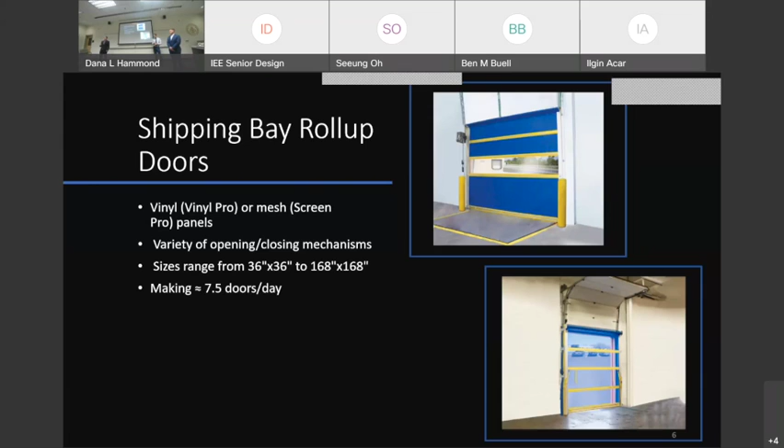What we're working on is their shipping bay roll-up doors. These can consist of different materials, but the main ones are vinyl or mesh material. They have a variety of opening and closing mechanisms for the doors. These can be a spring-loaded opening or closing mechanism, an internal motor, or an external motor, for example. The sizes range anywhere from 36 inches by 36 inches to 168 inches by 168 inches, although you can custom order sizes over 200 inches by 200 inches. Currently, they're making about 7.5 doors per day in their process.

To go over the actual assembly process, you'd start off with whatever material the door is made of. You would cut that over at the cutting table. Then you would take it over to the heat seal, where it would meet a piece of keder, like so, and the keder would be fed into the material. It's a bit sticky, so it takes a bit. Then it would be lined up properly and ran through the heat seal down in place, so that it's stuck together. It would do this for however long it needs to go—typically multiple presses for a door. It would be flipped and then pressed again for the other side as well.

Then this material would come back to the cutting table, where someone from the assembly table would come over, pick it up, and assemble it. And it would look something like this.

Now, this would use a wind bar here. This would be fed into the actual door, and it would allow it to line up. So this would be the actual height of one of the panels, and it would be multiple panels stacked up, and it would go out for however long the width is needed to be.

When you get to the bottom portion, you would take a bottom bar, and you would feed it in at the same process that you do with the normal keder, like so. And then also the bottom bar would have a specific end keder go on the bottom to make sure that it's nice and sealed.

And then the last part would take these breakaway tabs and they would go into the side of the door. And this would use the guide rails on the side when the door opens and closes to actually feed it in properly.

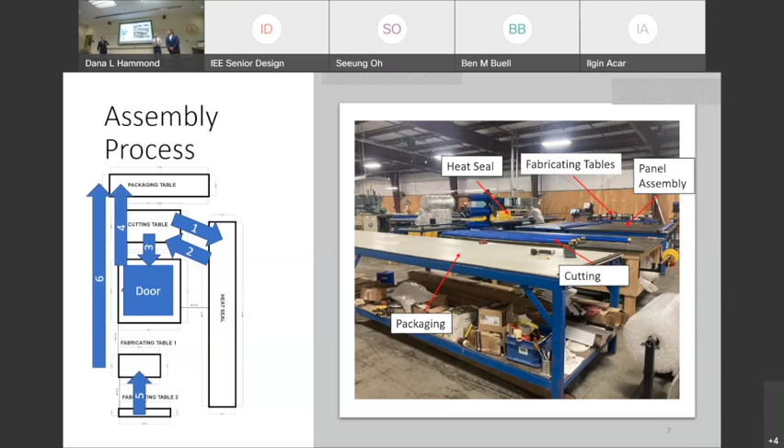At the same time as all that's going on, you'd be over at the fabricating tables where the actual cutting and drilling of the opening and closing mechanisms would be going on. Specifically the cutting at fabricating table 2, and typically the drilling over at fabricating table 1. When this is all done, the two different processes will meet up at packaging and they will be packaged together and then shipped out of the system.

So from that assembly process that Anthony just explained, we come to the challenge of throughput. Senneca came to us with this project because they're currently facing a 2 to 4 month lead time with their screen doors, and they're really struggling to keep up with demand that has been increasing over the past few years. Senneca came to us and wanted us to create a one-piece flow in the production and have everything run a little more smoothly and have less wait times between stations.

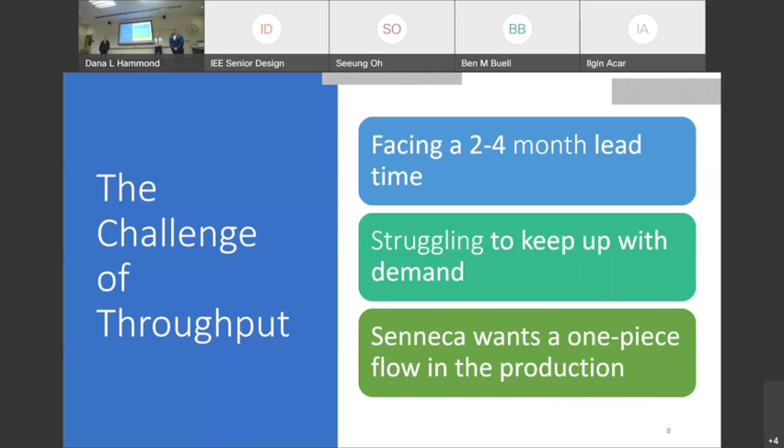So to sum that up into a challenge statement: we want to design an approach to reduce bottlenecks and inventory levels, increase throughput, and help meet a one-piece flow system.

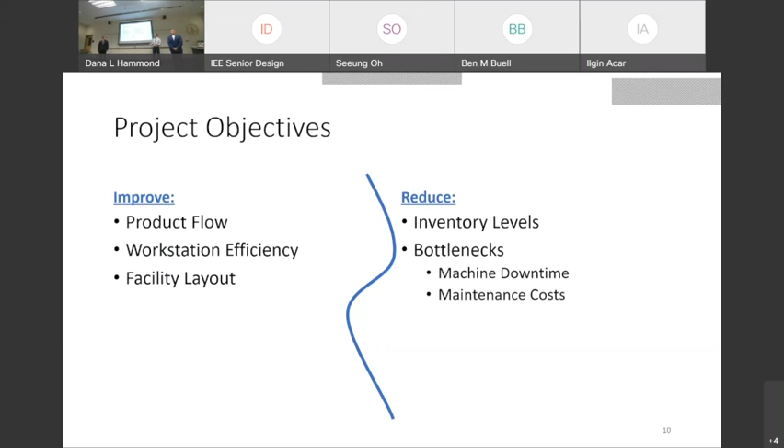To break that down with our project objectives, we have 5 of them. We want to improve the product flow. We also want to improve the workstation efficiency of the department, and we also want to do some facility layout changes. On top of improving those things, we want to reduce the inventory levels, and we also want to reduce machine downtime and maintenance costs of the bottleneck.

To organize our whole project, we used the Six Sigma problem-solving approach called DMAIC. DMAIC is a data-driven tool used for optimizing and maintaining business processes. DMAIC stands for Define, Measure, Analyze, Improve, and Control.

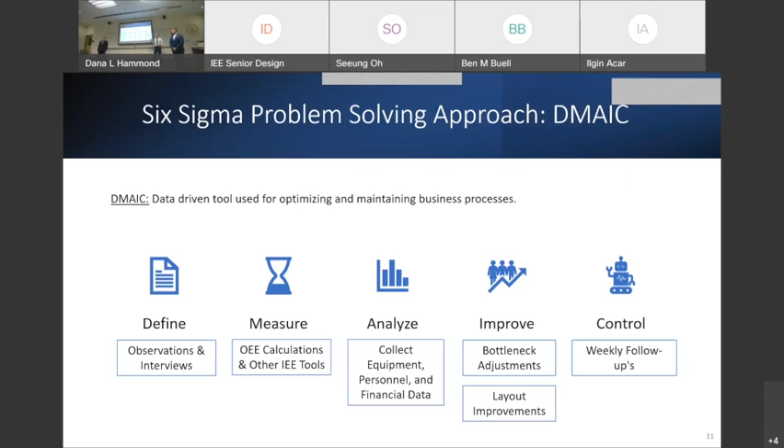What we did is we initially defined our problem through observations and interviews with current employees and management. From there, we were able to find the correct tools to measure those problems, and then we went into analyzing those measurements and collecting data. From there, we were able to make improvements, and we want to do weekly follow-ups with Senneca to control the improvements that we made.

So the first step of DMAIC is defining the problem. We have 3 main points that we want to talk about for this presentation. The first one being inventory levels. We found that there was an extreme amount of excess inventory at Senneca in the facility, and we also found out that there were some racks that were unorganized.

The second point is facility layout. There's some insufficient space and some things we want to move around. There are some lighting issues in the department, and we also want to do some workstation design changes.

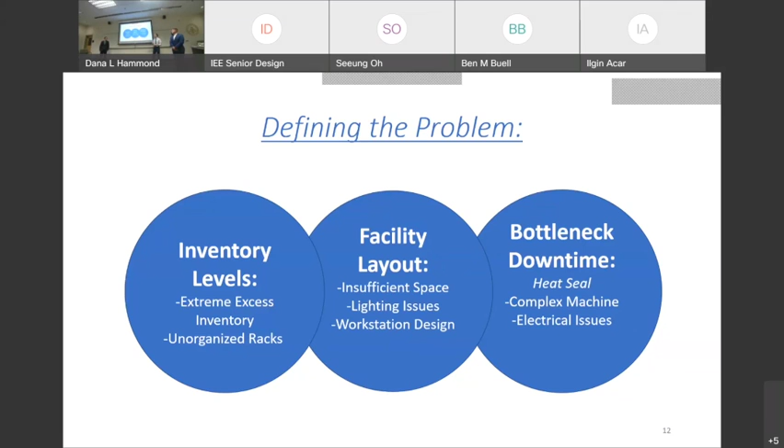Finally, the biggest topic that we spent the most time on for this project was the bottleneck downtime. We found the bottleneck to be the heat seal, and we'll go more in depth on that later, but the heat seal is a very complex machine that has been having electrical issues.

So the first topic is inventory management. We found that there are over 5 racks of vinyl rolls to make those screen doors, as you can see in this picture, and that really takes up a lot of space. We also found that there were 53 years worth of the least used rolls, and there's a large variety of these different colors and sizes, so there's a lot of different options for the customer.

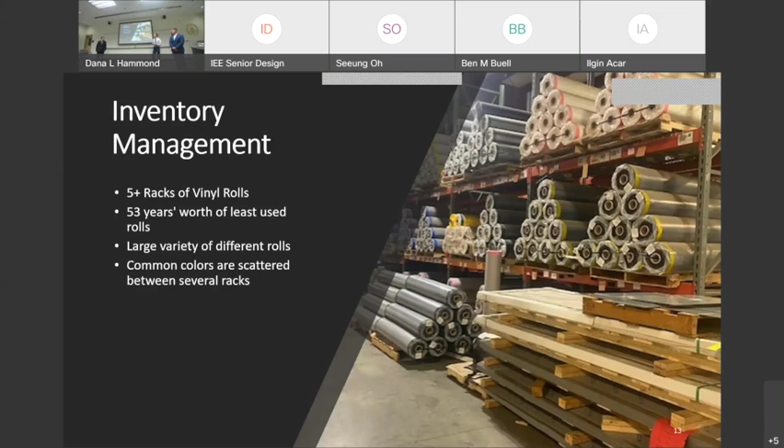The common colors mostly bought by customers are really scattered between the racks in the facility. Based on a walkthrough we did in April, we found the most common colors only took up 31% of the inventory space, and the most common colors we've seen throughout the year on this project were the blue, red, and gray screen doors.

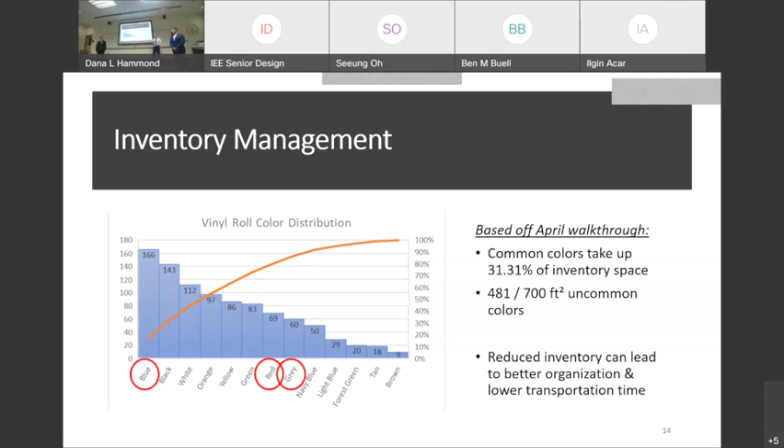That means around 500 out of the 700 square feet of inventory space were taken up by uncommon colors. So we think that if we can reduce these other colored doors a little bit, it can lead to better organization in the facility, and we can also move those more common colors to racks closer to the department we're working with.

Now Noah is going to go to our next topic, which is facility layout.

For facility layout and workstation design, the first thing we did was interview employees and the supervisor, John. The first complaint we got was the lighting in the department. As you can tell, it seemed pretty dull in there with the lighting—it was just some overhead lighting.

So we went around to each workstation and measured each of the four corners. We averaged it out to about 200 to 300 lux per workstation. According to OSHA and ISHN, it's supposed to be around 500 to 750, and with precise work at the fabricating tables—like precision drilling and sawing—it should be around 1,000.

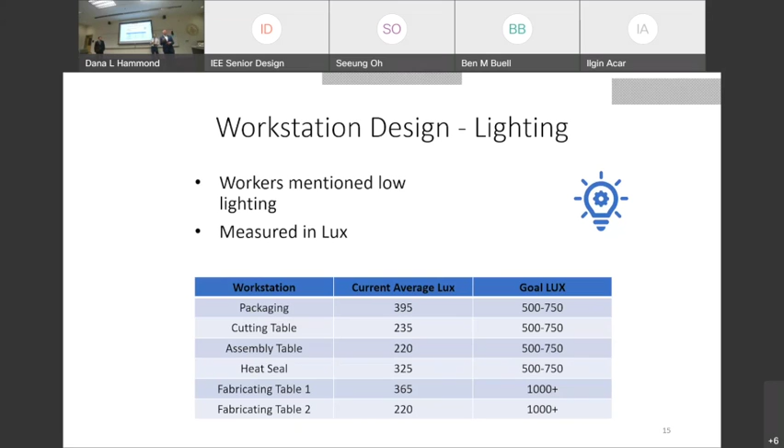Here's the old lighting, as we can see, just overhead lighting, and with this it created a lot of shadows, which could lead to error, especially at those fabricating tables.

So we brought this up to John, and on April 7th they actually installed new lighting—some overhead aisle lighting. With the new lighting, we measured it and it came out to be 700, 800, even 900 lux.

But the one problem we encountered again was the fabricating tables. They didn't get an overhead light, so a lot of the lighting was behind them, which created even more intense shadows. So we're going to recommend getting a new light for those fabricating tables so there'd be less error.

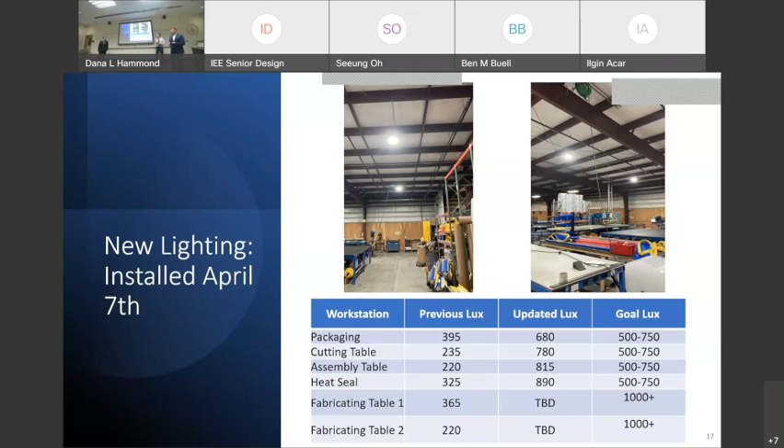The next thing we want to talk about is the packaging table and the packaging table blockage. The packaging table, as we see here, goes into the walkway we need, and it bleeds out with all the shipments, with carts around it too. We want this walkway open for forklifts and people going from department to department, so it really blocks things up.

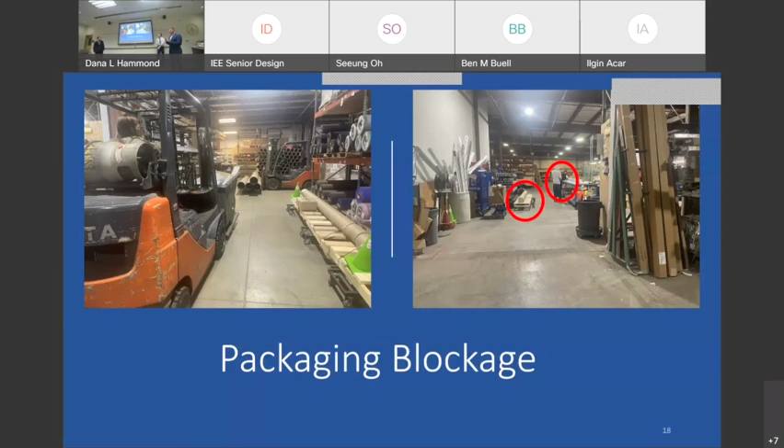So we're going to recommend combining the fabricating tables into one table. With that, we can bring down the assembly table, cutting table, and packaging table together, so it stops bleeding into the walkway and we can have increased flow through it.

With this, there'll also be canceled walking between the two tables, because we took time studies and found there's just unnecessary walking between the two tables when going from drilling.

We talked to the lead fabricator there, Ryan, and he showed us a workstation in a different department of the facility, bottom right. It's something we're going to recommend as a one-work-table setup—we can have it all in one for them.

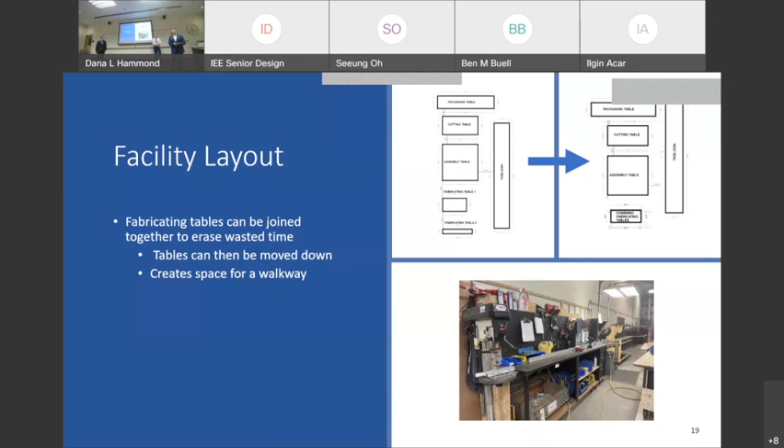First off, the machine isn't made for the process they're using it for, and it's also very old with a lot of wear and tear. We talked to the in-house maintenance man, Bob, who said there are a lot of problems they're encountering: wiring issues, circuit board issues, and overheating and arcing.

If Bob can't fix it, they send it outsourced to another maintenance man through a supplier, which costs more money and leads to greater downtime.

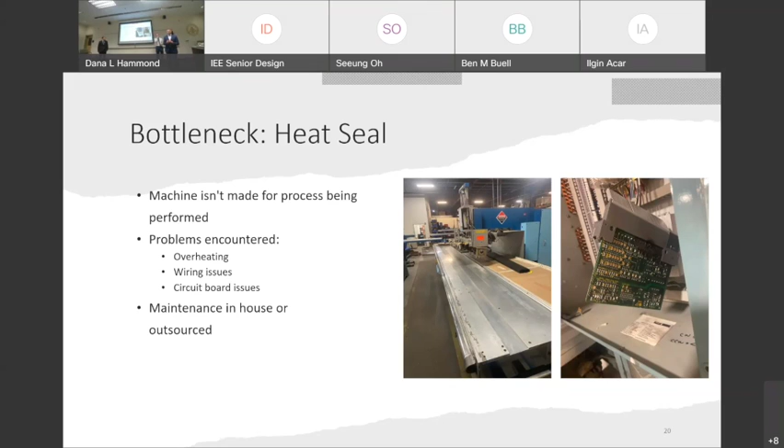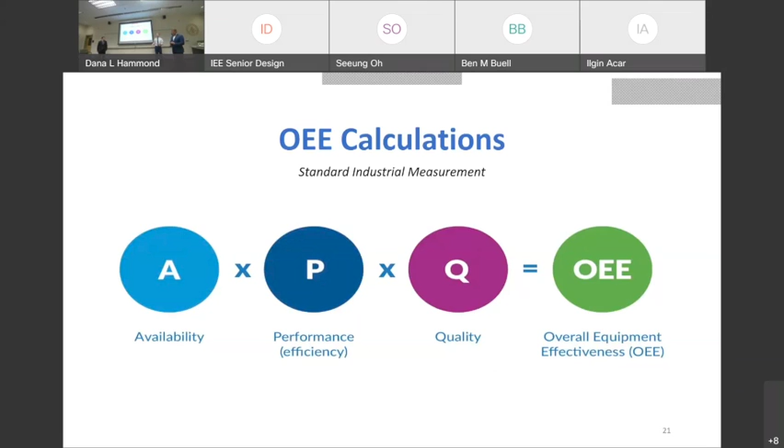And we estimated the downtime for the heat seal to be down for about 45 days a year. So to measure the performance of this heat seal, we used OEE calculations, which stands for Overall Equipment Effectiveness. It's a standard industrial measurement that a lot of companies use. What you do is multiply the availability of the machine by the performance of the machine, and then by the quality of the machine.

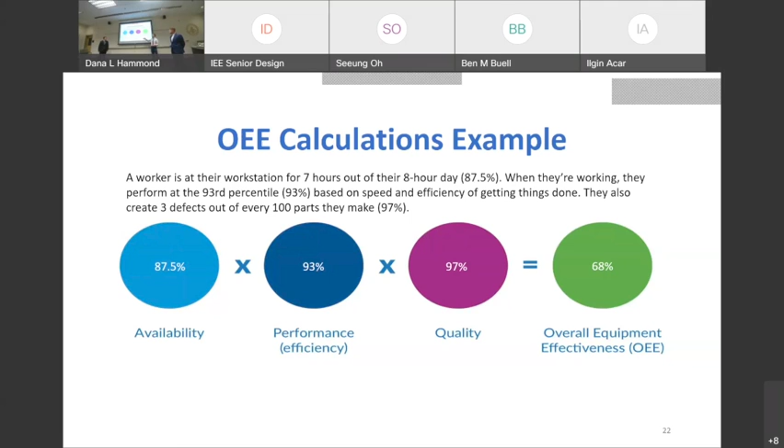So to go over a quick example so you guys know how it works, let's say a worker is at their workstation for 7 hours out of their 8-hour day, so 87.5%. When they're working, they perform at the 93rd percentile based on the speed and efficiency of getting their job done, and they also create 3 defects out of every 100 parts they make. So what you would do is put all those percentages together and get your OEE calculation.

So for the heat seal, we did just that, and we found that the major issues were the availability of the machine and the performance of the machine. They were sitting at 81% and 80%. That got us an overall equipment effectiveness of 64.15%.

Now, when we did a little research into OEE calculations, we found out that 60% is typical for manufacturing industries. So we're at a typical level right now, but 85% is considered world-class. Based on how competitive markets are today, we want to move this process up to the world-class level.

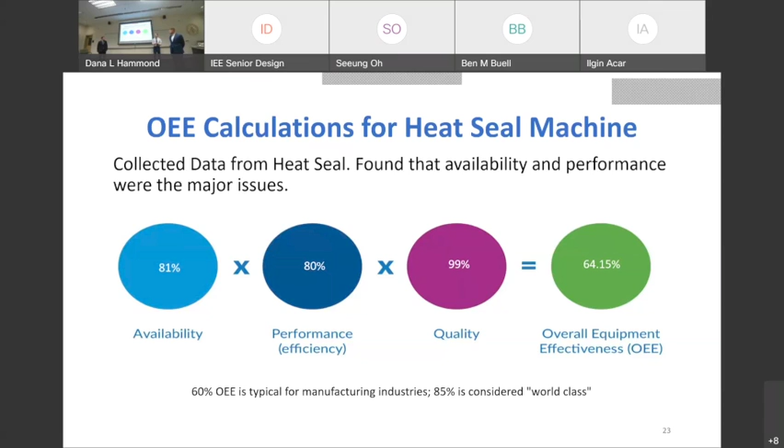So the first thing we did with the heat seal is that we started taking time studies of it. We took time studies for about 20 times, and we also did time studies for the shipment builds and also the drilling press. With this in the center table, we broke it down for the heat seal per process.

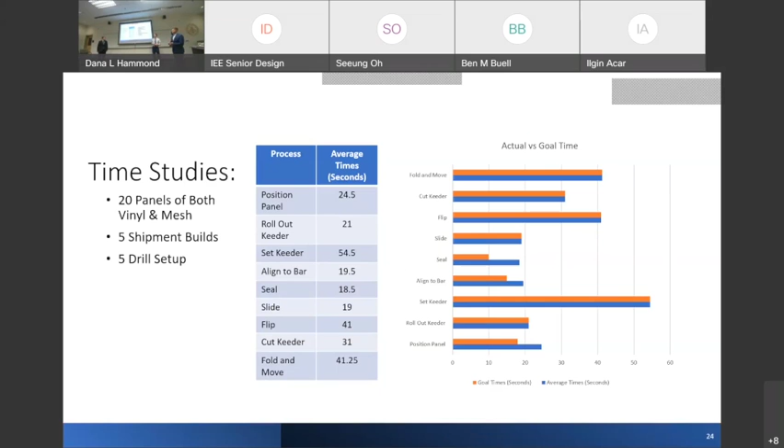We took the averages of that, and then on the graph on the right, we have actual versus goal time. That is, the goal time is for some processes within the heat seal that we think can be a smaller amount of time due to a new machine, which leads us to my next slide, which is we're going to recommend a new machine for Senneca.

So the heat seal, as I said, is down for about 45 days a year. So in production, that's pretty not okay for us. So we want to look at the R-Flex and the R-Flex travel by Miller Weldmaster.

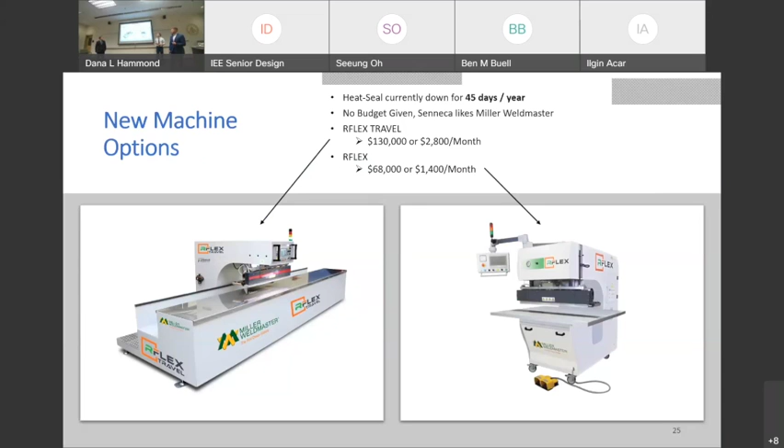As we asked John, he recommended Miller Weldmaster, as they keep those machines in other parts of the facility. And we found the R-Flex travel would be the best one for us because it's almost a direct replacement of the machine they have, and it would just decrease that downtime for them.

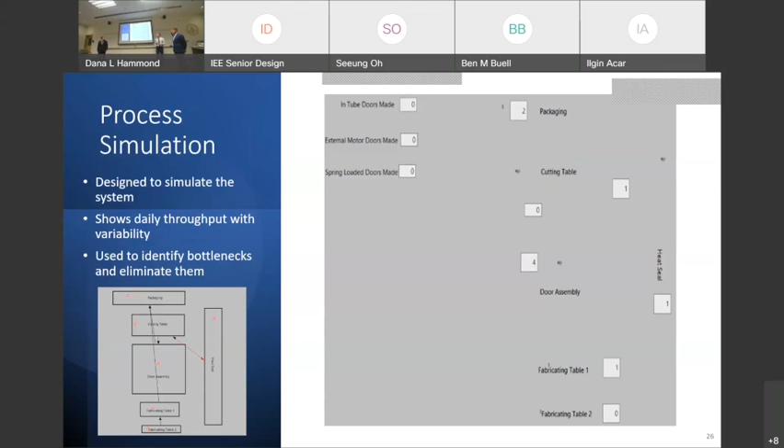So to be able to actually see how a new machine might perform and change the system, we need to design a process simulation. The process simulation would recreate the system in a digital environment. It would show daily variability in the throughput via the time studies that we used, to identify the bottlenecks, such as the heat seal, and see how different changes would affect the system.

So the current system in the simulation was the first thing that we built. Currently, we have it producing about 7.84 doors per day in the simulation, and that will be a 95% confidence that it's between 7.09 and 8.59 doors per day. This lines up really well with the 7.5 doors per day of current throughput that they have in the system.

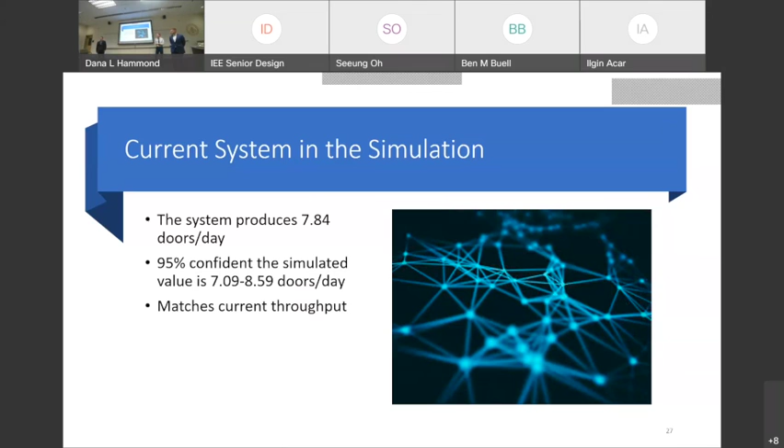Then we moved on to the improved simulation. So for this, we merged fabricating tables 1 and 2 together. This would allow us to bring everything in and clear up the aisleway. At the same time, we also introduced a new heat seal machine.

We created a variety of different simulations for this. Some of the main ones are shown here. To go over them, the worst case scenario is that there is no speed increase from the new machine, and that it is purely a reduced unplanned downtime.

For the most likely scenario, it was a slight increase to the actual sealing process, and an unplanned downtime reduced to 10 days out of the year. The best case scenario was a variety of improvements to the actual speed itself in the system at the heat seal, and a 0 downtime at the machine.

And then the one seal is a theoretical approach. We've not seen anything capable yet of producing this, but it would pretty much just do the entire heat sealing process in one push instead of having to do multiple pushes for the length, flip, and again.

So these resulted in an 8% increase for the worst case scenario, an 18% increase for the most likely, a 23% for the best, and a 39% for that theoretical 1 seal process.

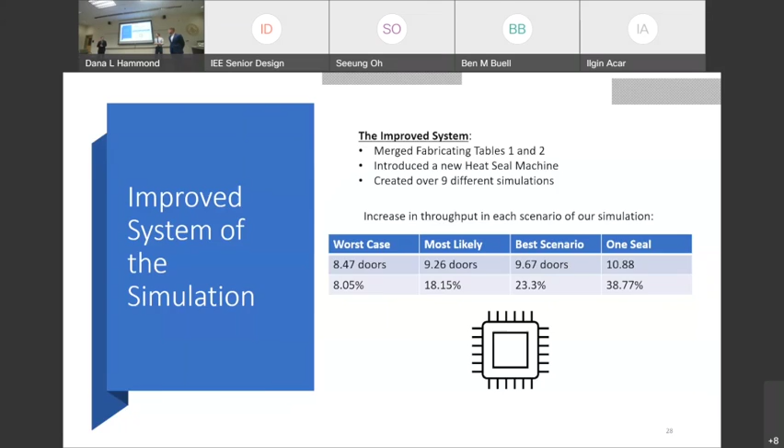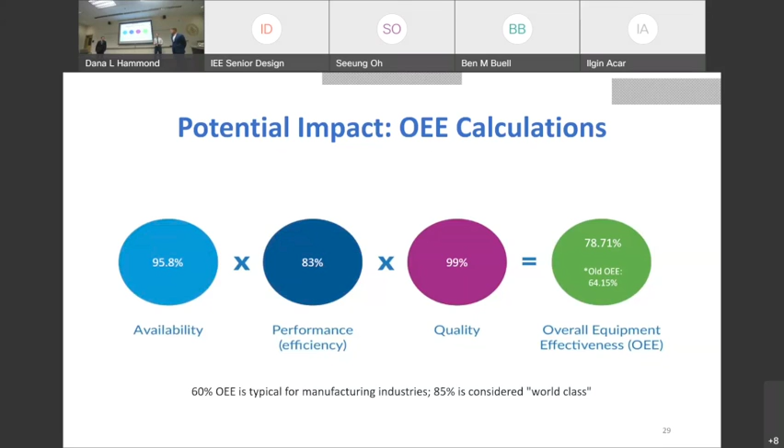Based on that improved system that we created, we redid the OEE calculation, and we could see that the availability increased up to 95.8% from 81% currently, mostly due to reduced downtime with that new machine. We also saw performance increase a little bit, which gave us a new overall equipment effectiveness measurement of 78.71%, a pretty big jump from the 64% we had previously.

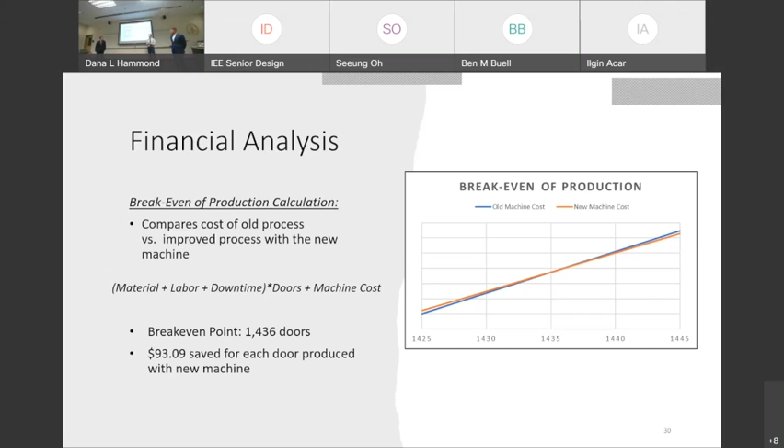We added the material, labor, and downtime costs per door, and then added the new machine costs for that improved setup. We compared the two against each other and found that our break-even point was at 1,436 doors.

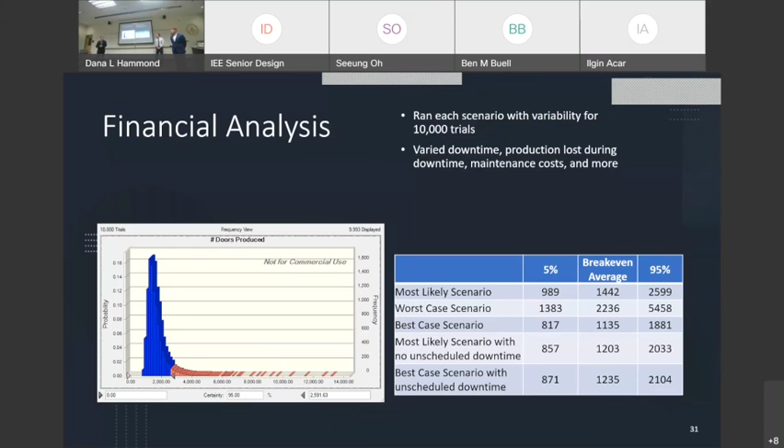Another thing to note is that even in the worst case of the worst case, the 95% worst case scenario, we were still breaking even after about 5,500 doors, which is about 4 years of production roughly, which means it's a good idea to consider.

To go over the recommendations for Senneca, we have short-term and long-term recommendations. For the short term, we want to combine those fabricating tables to improve the walkway for the forklifts, and also add additional lighting for the fabricating table or tables, depending on which one they do first.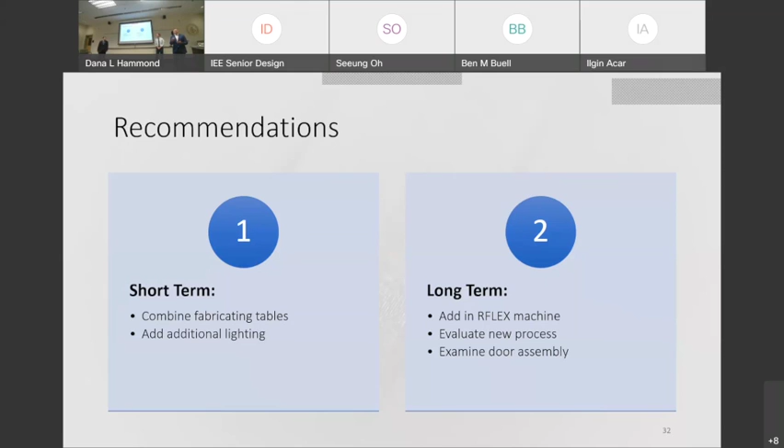For the long term, we want to recommend adding in that R-Flex machine, as we saw increased throughput into the system. We also want to evaluate the new processes, and with that, start examining the door assembly, because in our simulation we saw that the door assembly started becoming the new bottleneck.

To recap the whole project, John came to us struggling with the demand and throughput of the system. We broke it down into about 3 different topics: inventory levels, facility layout and workstation design, and bottleneck downtime.

For inventory levels, we want to reduce the less used rolls, which would clear up space for them. For facility layout and workstation design, we want to rearrange that layout as I said, which would increase the flow and also increase LUX. For the bottleneck downtime, a new machine, the R-Flex, would save about $93 per door.

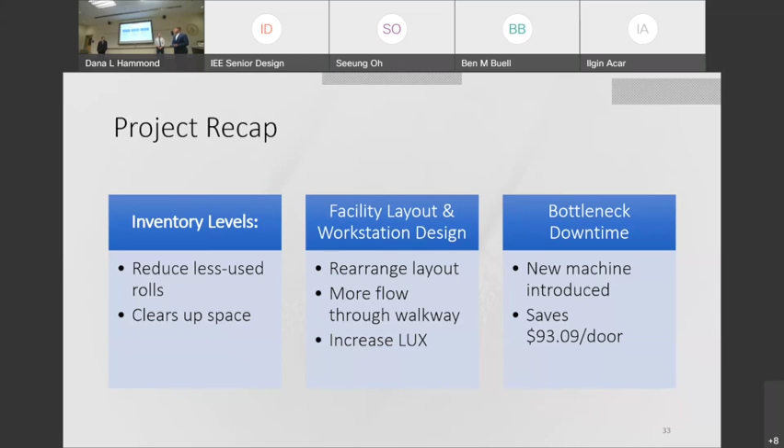I thought it was really well organized. I enjoyed the presentation. Did you get a sense of what the cost is of what it means? The cost of it? Yeah. The cost of the new machine was around, I think, $133,000 after shipping and installation costs.

Great project, very well done. Is there anything that was out of scope in your project initially that in hindsight you were wishing was in scope?

I would probably say with the out of scope initially, I would say the inventory levels. I wish we'd spend more time on that because that was a problem that was introduced to us kind of in March and April. So I wish we could focus more on that.